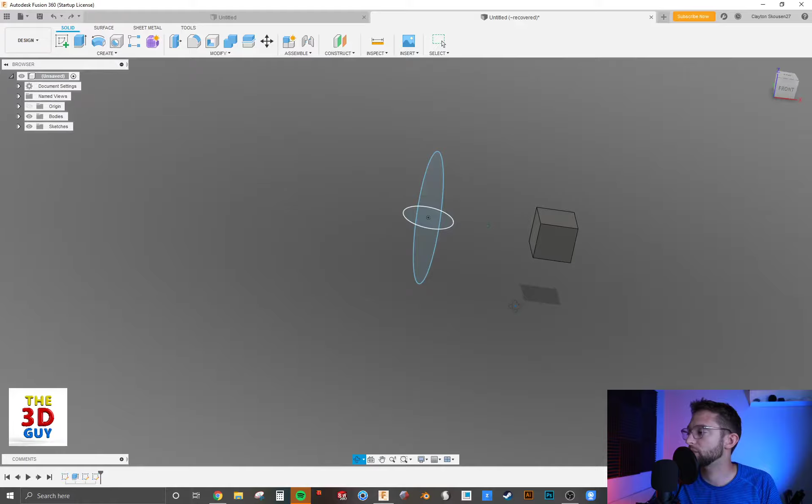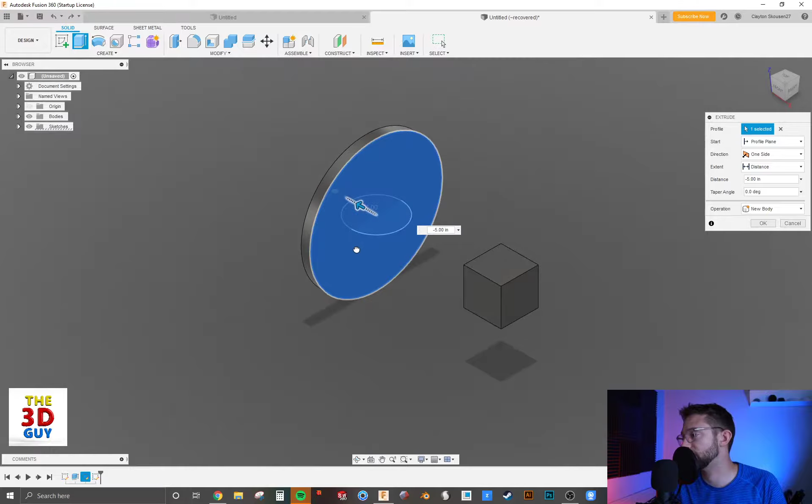Here it is, extrusion, the very first 3D feature, and the shortcut is E. We're going to click on that, and we're just going to use this first profile right here. You can see it already highlights, so you know it's been selected, and we have this arrow. We can click on that and drag it, click and hold down, or we have the option to type in the distance here. For the profile we've selected, it's currently just pulling from the plane where the sketch was made.

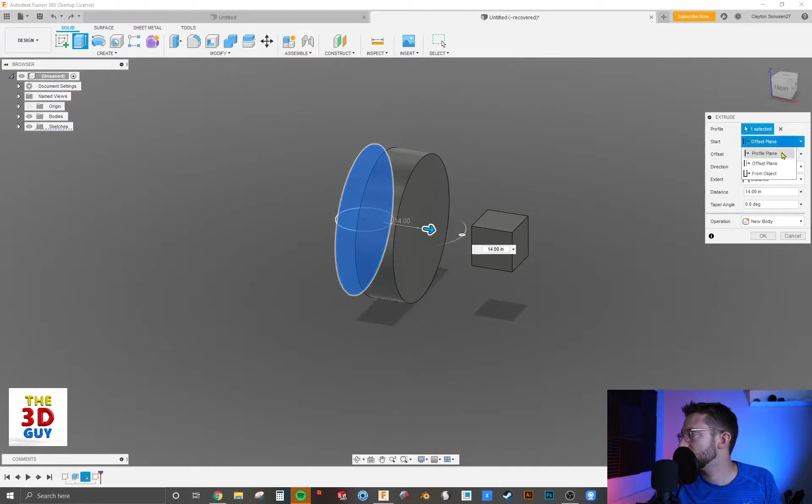That's what you can see right here. You can change it though to offset, which is kind of cool. So let's type in a different distance, let's say 7 inches, and you can see that this extrusion has been offset from the initial sketch. Another option is you can do it from an object, and it will project the extrusion parallel to the original sketch. I don't really use this feature or the previous one, I always use profile plane, but it's nice if it's something you choose to use.

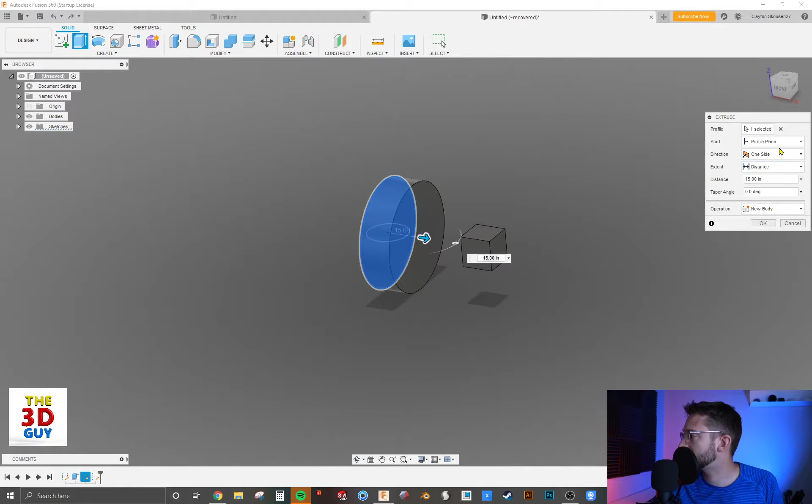Next, we have the direction. Currently we're just doing one side, and that's kind of interchangeable. We can also have two directions if we want a varying amount of extrusion on both sides. And last, we can actually have symmetric. I really like symmetric and one direction, they're both very useful, and it just makes it so the sketch stays in the middle of your object.

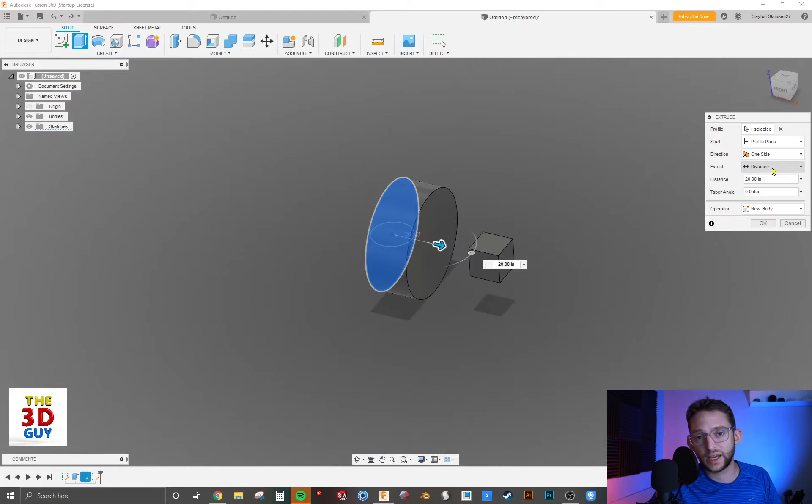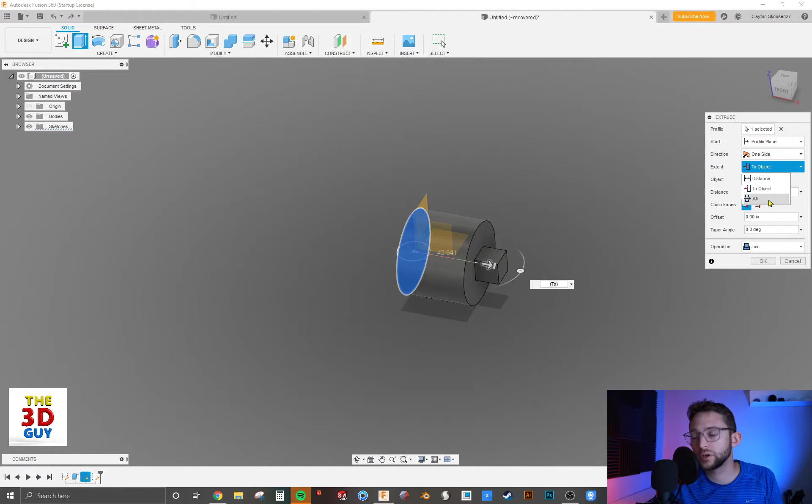Go back to that. Next is extent, how you want to extend. There are 3 options: just distance, which is what's either typed in or used with the arrow, or you can have it extend to an object. So let's have it extrude to that plane, and it extruded up to that surface. Or we can have it go all the way through, which means it just goes through everything, and that's always going to result in a cut, as you can see, it's taking away everything. So we're just going to go back to distance and shrink that back to right there.

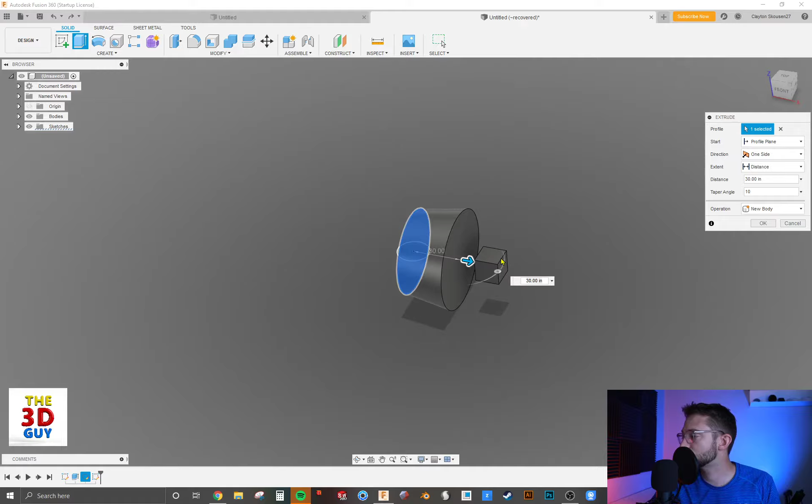Next we have, after distance, our taper angle. This is just if you want it to cone out. So let's do 10 degrees, and it's coned it out. You can also do negative to make it go the opposite direction. Or you have this circle right here, you can grab onto this toggle and do it manually, which is also a nice, quicker feature if you'd like. We're just going to click OK and create that little cone shape.

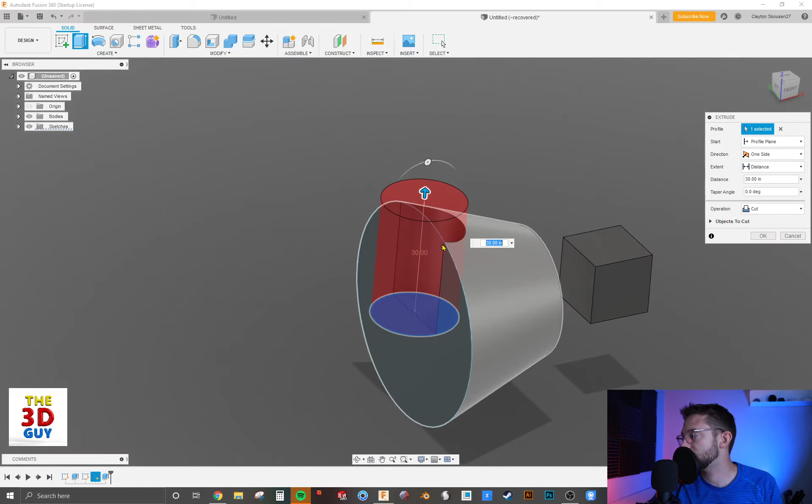Last, we are going to show how you can manipulate a cut with extrude. We're going to click on this little guy. Because it is overlapping inside of a physical object, it's automatically going to default to cut, and you can see that this little cylinder is being cut out. You can also change it back to join, so a physical cylinder, you have these 2 connected. You can also intersect, which is kind of cool, it'll just have whatever is overlapped between those 2 objects.

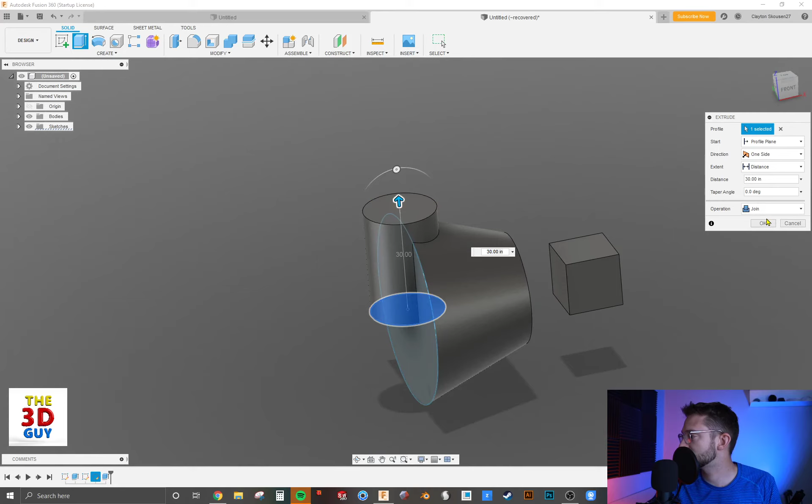You can also do a new body, which is similar to join, except it's just saying this whole cylinder right here is a separate entity to this cylinder, so you can grab it and drop it around in other locations if you wanted to. And that is extruding in a nutshell. Again, it is a very, very powerful and useful feature, it will be the one you use the most in the 3D modeling area.